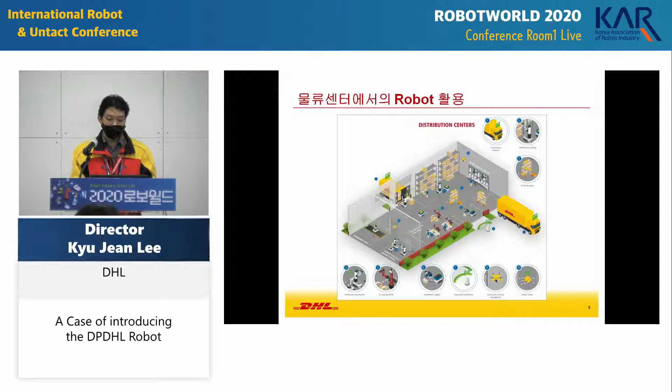These innovative ideas are happening in DPDHL, thanks to the Research Institute and our DPDHL Innovation Center. Our innovation centers are located on each continent. First of all, as you can see, we have one in Europe, in Germany.

In 2017, we newly opened one in Chicago. At the bottom, we have the Asia Pacific Center located in Singapore. These innovation centers not only provide R&D among workers but also collaborate with certain research centers and logistics experts. In our innovation centers, they carry out various R&D activities, and those products become implemented in our processes. This is the newly innovated center in Chicago, and I will introduce you to that center in the video.

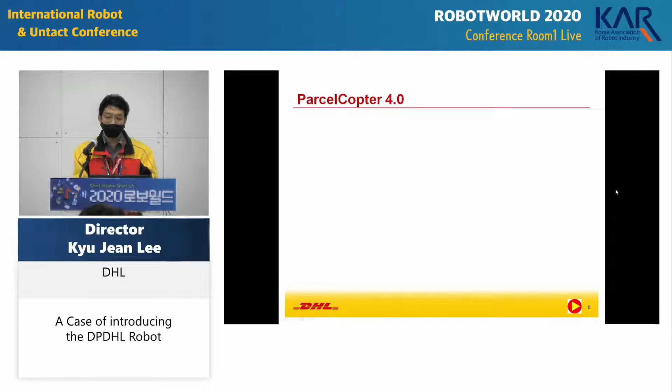First of all, it's called Parcel Copter 4.0. A lot of media has introduced our parcel copters. About 6 years ago, there was a big boom of drones. Drone started as a leisure gadget, but we started to utilize it for our logistics. We began R&D in 2010, launched 1.0 in 2013, and recently in 2018 we managed to roll out Parcel Copter 4.0. Usually we use this Parcel Copter in remote areas with low accessibility, like in Africa.

I would like to briefly show you the different versions. This is Parcel Copter 1.0, promoted in media, but it still had a lot of issues to improve. 2.0 managed to travel 1 kilometer. After modifying and studying it more, we improved the flying distance up to 12 kilometers, and the model now reaches beach areas and remote areas with low accessibility.

Next is Parcel Copter 3.0. The form changed a lot - we used to have 4 propellers, but now it's more close to a regular plane. 3.0 can fly 8 kilometers, and wind resistance and environmental conditions have been improved.

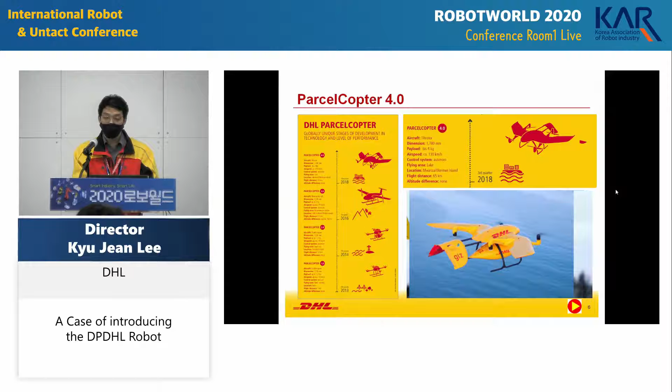In 2018, finally we rolled out Parcel Copter 4.0. It can easily fly and doesn't need a runway - it can take off vertically, reducing the requirement of space. It can fly up to 65 kilometers. This is a bulky helicopter, about 1.7 meters tall.

Now I would like to show you an actual case on site utilizing Parcel Copter 4.0. Let's look at the video.

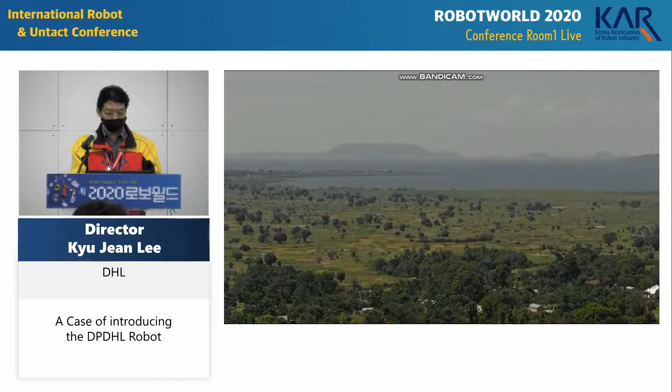Especially in areas that have geographical challenges, like Ukerewe, which is in the midst of Lake Victoria, we have more than 400,000 people in Ukerewe district, and we face a number of diseases such as malaria, typhoid, schistosomiasis, and the like.

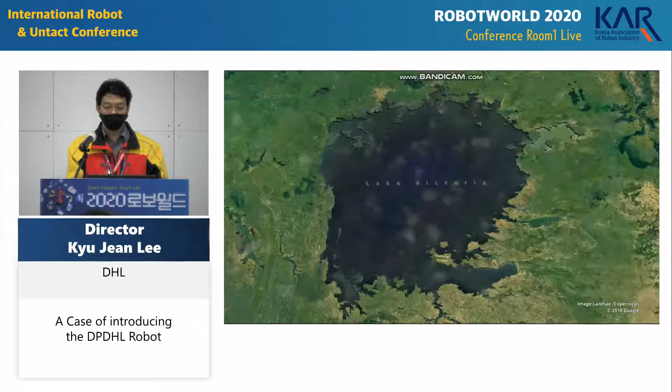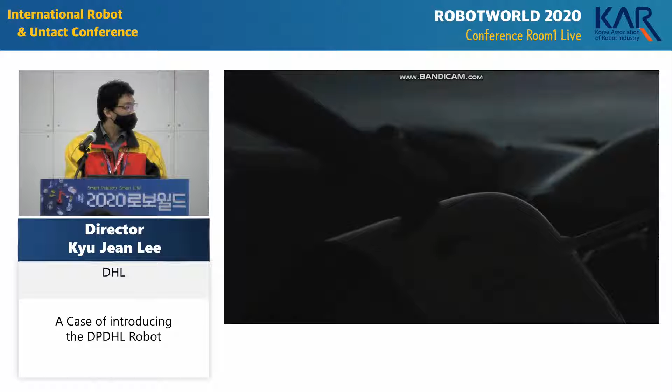We are responsible for distributing medicine in the Lake Victoria region. The last mile supply is so difficult because of the infrastructure - our roads are still very poor, especially in rural areas. We can go by lake, but the vessels there are not reliable, and you don't get the necessary medicine delivered. There is a threat of death. We thought about how we can improve the delivery of health supplies, especially to those hard-to-reach island areas, and that's where the Parcel Copter comes into play.

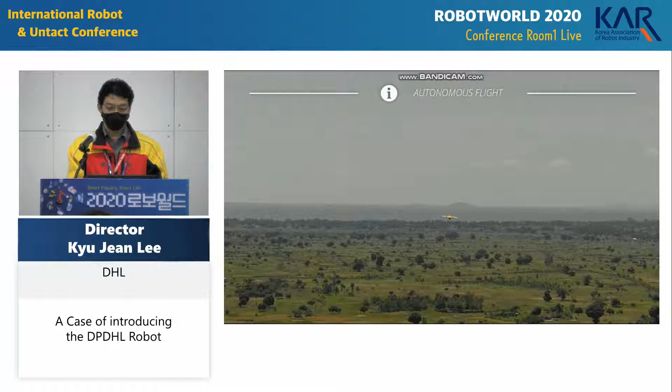The drone can overcome a number of challenges, especially in areas that are not really reachable. The Parcel Copter flies autonomously, and we can see where the drone is in case we need to make any decision at the right time. The technology gives the drone the ability to go vertically and then change to transition mode, so it can land where you don't have runways. The technology itself is innovative in the sense that it really addresses challenges that we have in Tanzania.

There was a case with a tetanus patient needing quick delivery. Not only does the Parcelcopter deliver commodities quickly, but it maintains the cold chain, making sure the temperature is not compromised so products reach the patient with quality. We design the mission, upload it to the drone, and it sends autonomously to the place we want, like from Mwanza to the Ukerewe Islands.

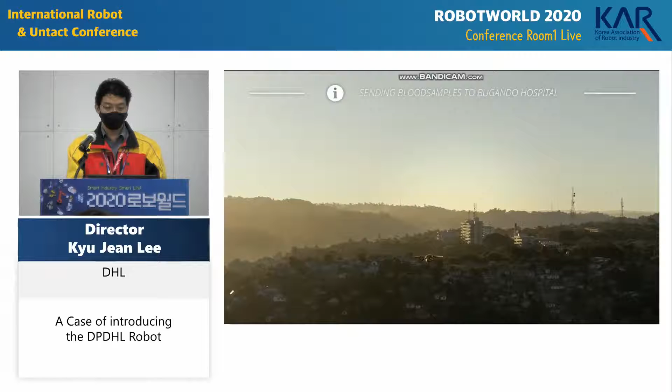Samples are collected at the district hospital, and on a weekly basis they are taken to the regional medical center. But with the Parcel Copter, they can be taken every 2 or 3 days instead, so patients get their results much faster without delay in treatment.

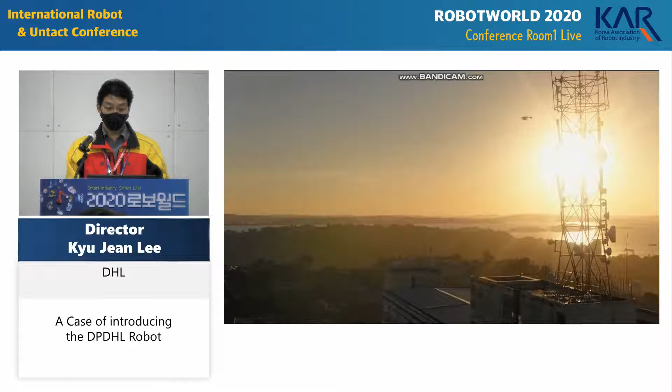I'd like to take this opportunity to thank DHL, GIZ, the Ministry for Economic Cooperation and Development, and the Wingcopter team. There were rough times when it started, but now we see light at the end of the tunnel.

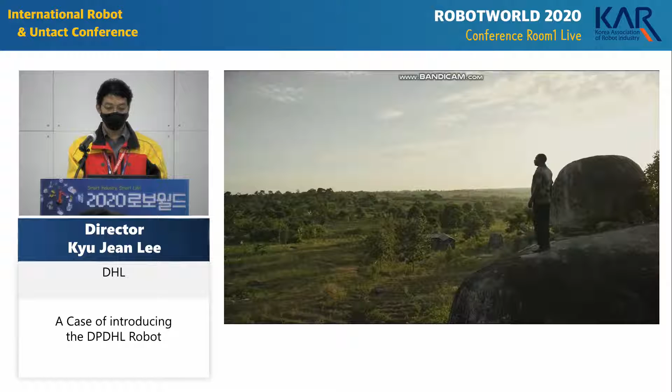If this can be carried throughout the country, that will be so significant. This is a project that is going to save a lot of lives and change the whole economy. This is going to be a big achievement, an icebreaker into drone technology in Tanzania.

And probably in Africa.

As you saw, we run all versions of parcel copters, particularly for hard-to-reach areas that need a lot of traveling, while there are still a lot of detours, and we have some challenges with heavy weights. So we focus on medicine delivery in particular at the moment, and we are constantly researching how we can expand this business. Let me move on to the next case.

The next AI robot is called PostBot. I would like to explain while playing the video.

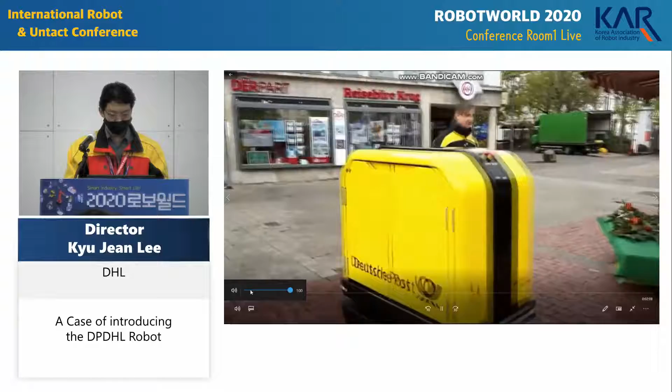Now, what you're seeing is the PostBot, an AI-based robot. If you look at this robot, this is specialized for delivering mail.

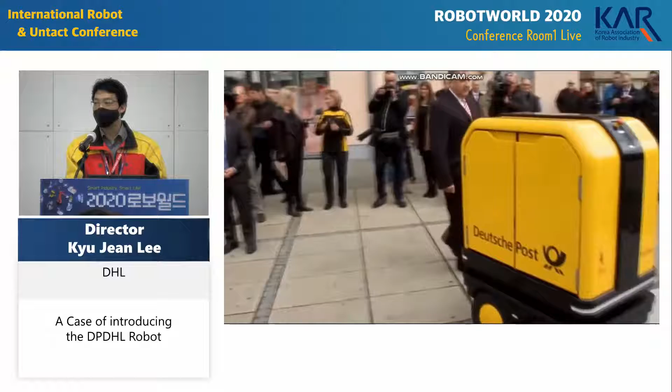As I mentioned, DPDHL stands for Deutsche Post DHL. So DHL in Germany also carries out some postal services, and sometimes they deal with various cargo and freight.

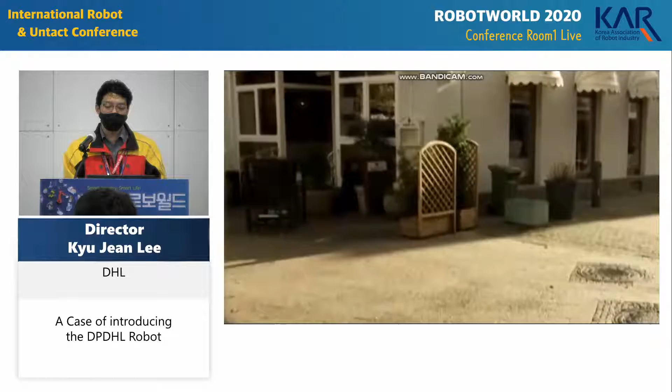So imagine our postal service. Sometimes there are areas you can't reach by vehicles, and you have to deliver many things at the same time. It will be very inconvenient if you go back and forth to your truck to load and unload the parcels. If you look at this PostBot, it uses a sensor, and the sensor tracks around the parcel and helps the mail carrier immediately deliver the parcels.

You can load up to 160 kilograms onto the PostBot. And you can imagine we can save a lot of time and energy for the mail carriers.

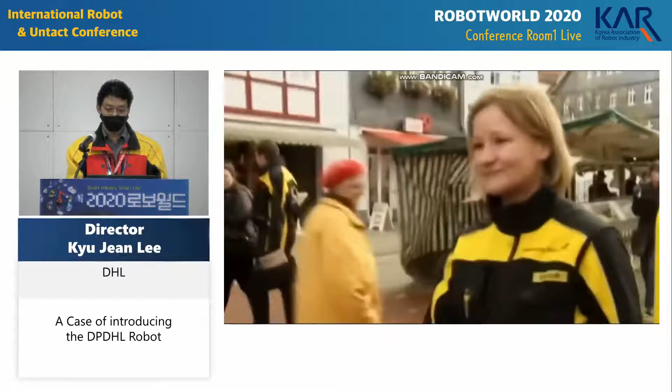So you just saw PostBot following around the mail carrier. How about PostBot going into the building? That's shown in the next slide.

This looks similar to PostBot. Functions are similar, but Effidence is not specialized in mail delivery, but specialized in cargo delivery.

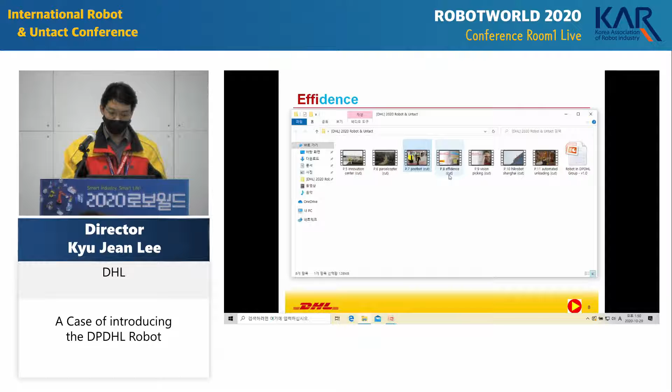Automation strategies are vital to warehousing and distribution operations. DHL is dedicated to offering a variety of automated systems to significantly increase efficiencies in customer operations. Now, DHL will lead the next wave of automation. Within warehousing, order picking belongs to the most challenging tasks as the demands made on order picking systems continue to grow.

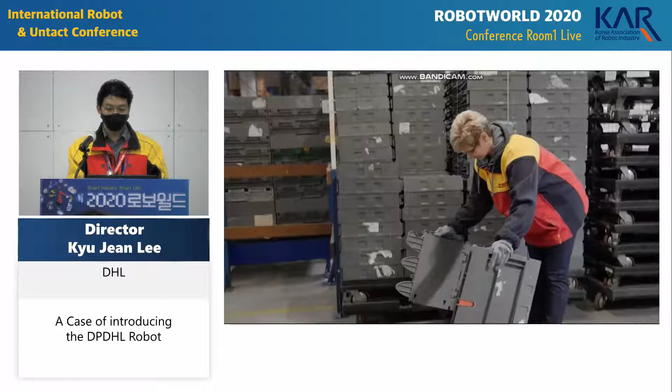When employees pick orders manually, their carts become very heavy. High payloads of orders — what you're seeing now is before Effidence was introduced, showing how our employees used to move to do the picking.

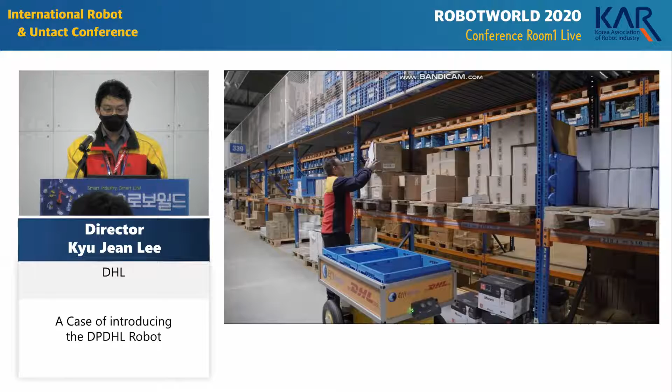Together with Effidence, we are introducing a unique solution to support our employees in their daily work and to improve efficiencies within the picking process. Collaborative automated order picking is the next step in improving warehouse operations. Pickers will be supported by automated carts, taking care of most of the physical activity. These carts enable pickers to work without undue exertion.

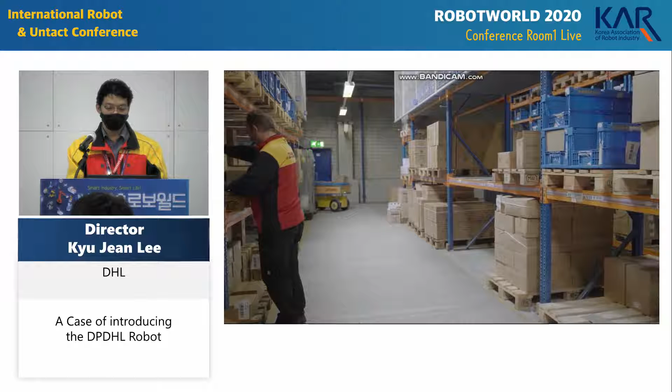The picking cart follows the picker through the rack system. Before the cart reaches full capacity, the picker simply sends it to the drop-off location. Meanwhile, another picking cart joins the picker, ready to receive new items. The cart's advanced wayfinding routine assures an independent journey to its destination. Sensors make the cart aware of its vicinity and possible obstacles. Therefore, collisions are prevented and safety is increased.

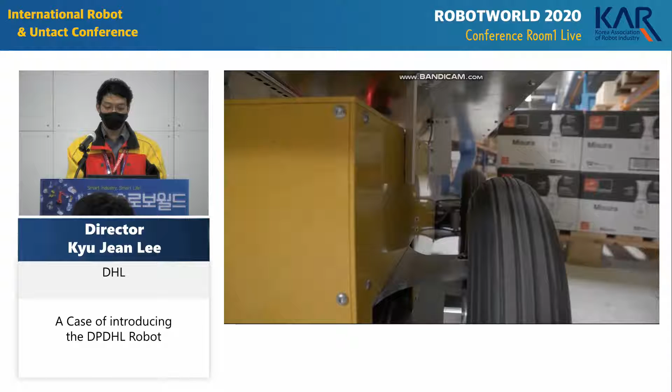Furthermore, this solution makes a more efficient and ergonomic picking process possible and enables the switch from single order to multi-order picking. Collaborative automated order picking is just one flexible solution that might fit into the world of logistics. We're just beginning to understand the magnitude of this impact. At DHL, we're prepared to innovate and navigate this road to the future of logistics. Along with our partners and customers, we're ready to take the front seat.

As you can see, once it reaches a certain volume, it goes to the next location and destination, and Effidence keeps following the workers.

We can drastically improve the human routes, and we can help these workers in an ergonomic context, so we can also prevent any damages.

I just mentioned picking, and let me introduce another picking technology. The next one is called Vision Picking. Maybe you've seen it before. You can imagine Google Glasses for AR, and while we can improve the visibility, we can also improve the efficiency.

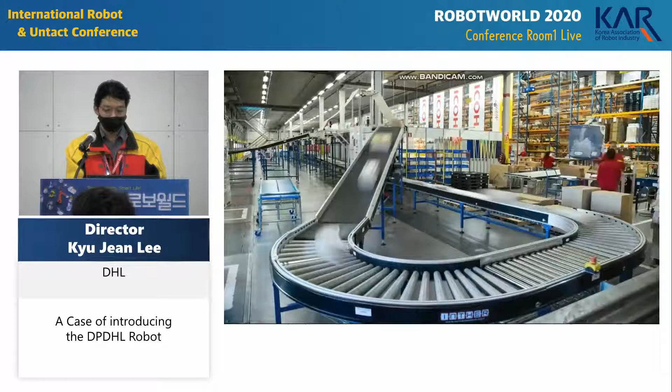Technology has always played an integral part in further improving warehouse operations. With the rise of augmented reality, we're about to take a leap ahead. DHL and Ricoh have piloted vision picking to drive the next wave of supply chain innovation that simplifies operations. Vision picking is essentially equipping pickers with smart glasses that enable complete hands-free order picking.

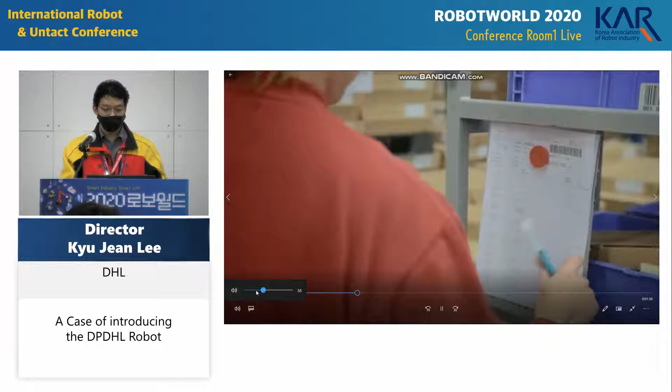Today, we're using a mix of handheld scanners and a paper pick list, but we think we can make this process leaner and more user-friendly by taking a paperless and hands-free approach. Vision picking can greatly increase productivity, reduce errors, and support our employees in their daily work. To find the best solution, we teamed up with Ubimax, the leading experts on wearable computing.

Their vision picking solution is the most mature and flexible on the market, and we're easily able to tailor this to our environment and deploy it on the Vuzix and Google glasses. Now the picker can easily log in and begin picking by scanning the next available trolley.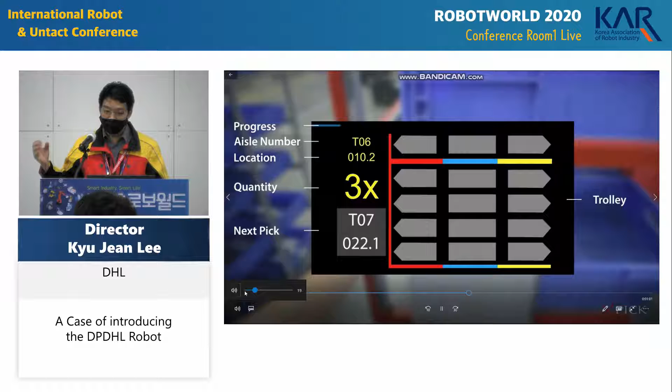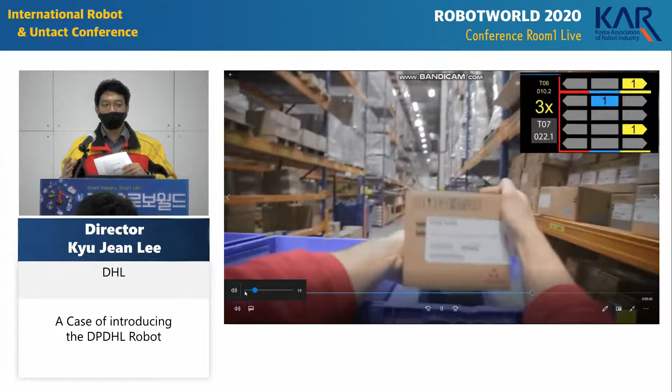The vision picking is actually guiding you where you can load the stuff in the right spot of the trolley. If you have less skilled workers, you can prevent some misloading, because sometimes they used to make the mistake of loading in the wrong order. But even if this person is a less skilled worker, this vision picking can improve efficiency.

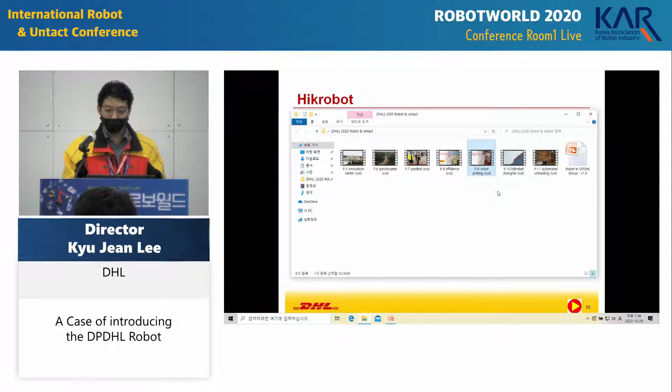Next robot is called Hikrobot. Hikrobot is a specific brand name, it is not the technology. If you look at the product, you can see them a lot in different conferences and events. It's not person to goods, it's goods to person - these goods are looking for people to be picked. If you look at this Hikrobot in Asia Pacific, we have an express hub in Shanghai where we actually carry out this Hikrobot.

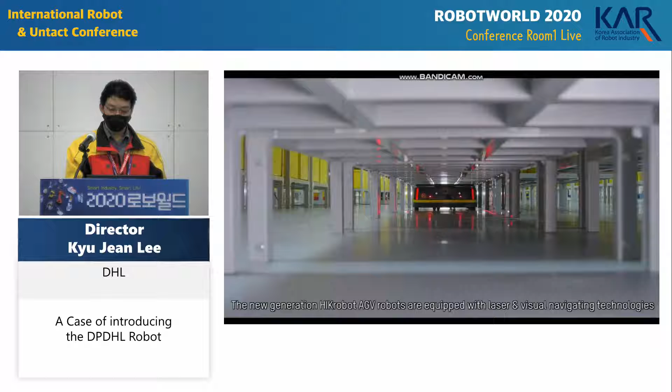Sorry, due to the time frame, let me stop the video.

By using Hikrobot, we managed to increase the work efficiency by 40%. Let's imagine instead of workers finding the rack, it was only 48 cases available per hour, but by using Hikrobot, we increased that number up to 136 cases. The last one is called automated container unloading.

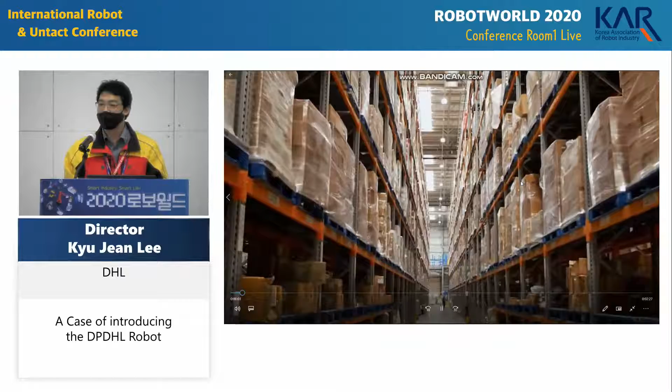Once we have large and bulky stuff, this device helps the efficiency. I won't play the video too long. As you can see, this is the traditional unloading - they had a space issue and only 1 or 2 people had to go into the container, and they had to do it manually one by one. But now by using a machine, we were able to improve the efficiency.

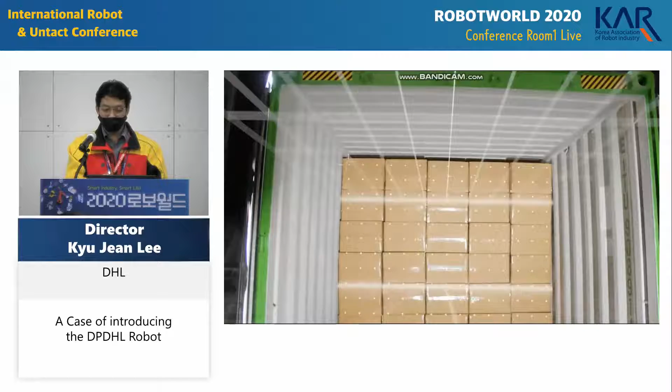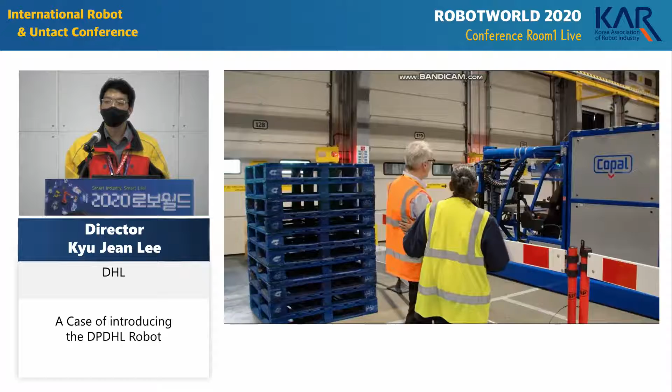This one you're looking at is the AI robot. We have the AI sensor in front of the machine, and it can recognize the type and volume of the boxes and decide the unloading method. Instead of people putting in effort, we are able to improve health and safety issues in an ergonomic context.

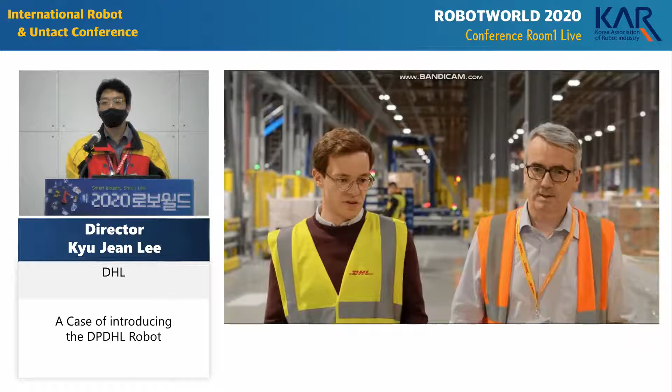In DHL, we value diversity. Often in logistics centers, we have a lot of male workers, and they are mostly skilled and muscular people, and usually these centers prefer younger generations. But as you can see, we have some older generations and some female workers in these centers thanks to this technology, and they are a great contribution to DHL.

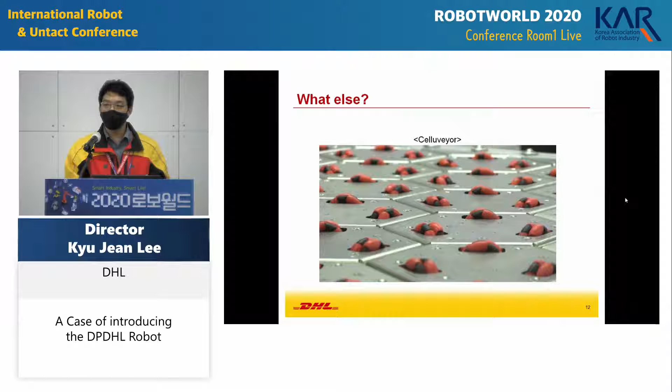I have a lot more technologies, but due to the time limit, that wraps up my case study. But you can imagine digital twin, Celluveyor, unlike the conveyor belt, and this is the innovation of the conveyor belt.

We have wearable robot arms as well, but in DHL these technologies do not remain on the textbook. We continuously carry out research to develop the technology. We invent technology, and other times, through M&A and collaboration, we purchase technologies. But one thing for sure is that we never stop continuing the innovation and our R&D. Thank you very much.

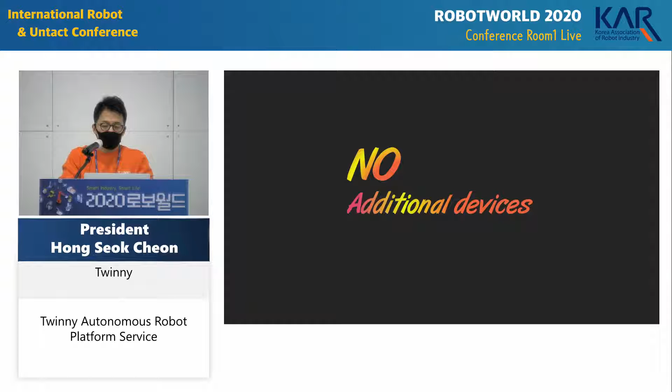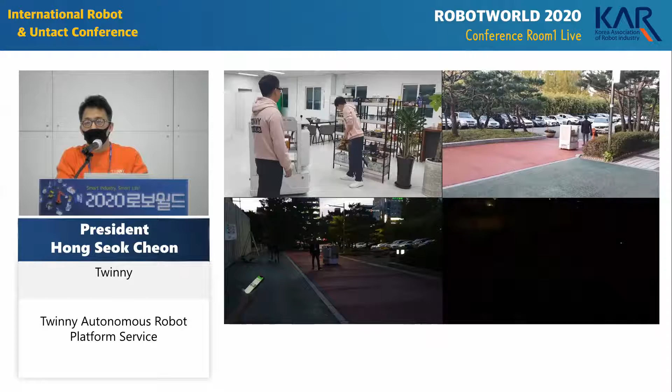On the left top video, we're twins wearing the same clothes, doing a demonstration. As this demonstration shows, the robot is not confused and follows the designated person without problem. We're showing the success cases, but we also face failures as well. Unlike other robots, the confusion possibility is much lower and it follows very well—good performance, but not as good as human beings.

If you see the video on the right bottom side, I turned the light on and off to see the effect of the light on the following. This kind of performance was possible because we used an RGB-D sensor whose cost is over $200.

It is capable of collecting 3D data, including location and color data. The color and location data are collected in a 3-dimensional way, and color distribution, size of each object, shape of the object, and other information are collected to form knowledge. Based on this knowledge, the robot follows an object. So the robot does not rely on specific color data, and that's why it can follow a specific designated person without any problem.

I also have two videos filmed outdoors, one at night and one during the day. If there is very strong sunlight, the sensor doesn't function well, but I intentionally took this video on a cloudy day for promotional purposes, to show how good we are.

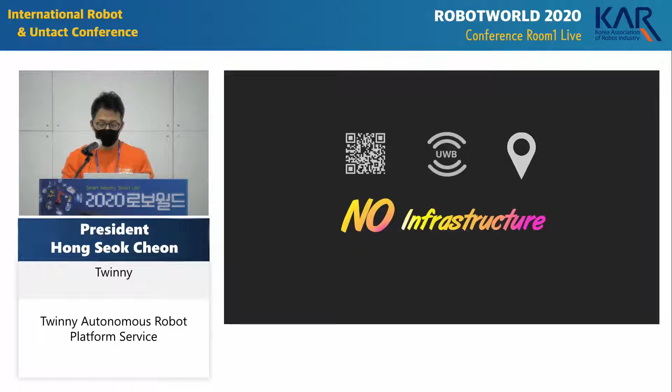If you were here yesterday, you must have seen it. At the Twinny booth, many journalists swarmed in, not just to take a picture of me, but because the Prime Minister came and did a demonstration, and journalists and so many people gathered near my booth without any additional infrastructure. If you go there, you see the robot roaming around the whole place, not just within the booth, and the robot does not get lost and goes around without any problem. So the complexity of the space does not bother the function of my robot.

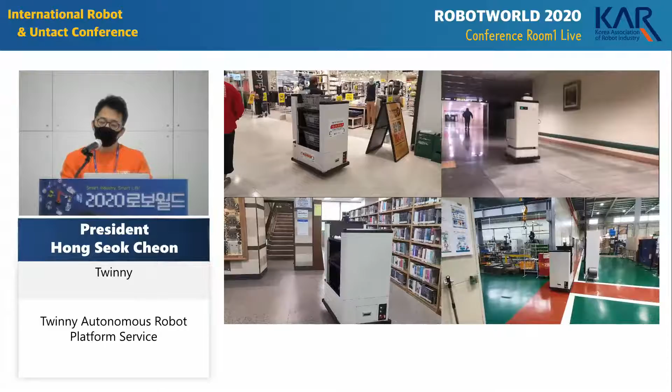This robot moves very well even at a mall, hospital, library, and logistic warehouse. I did multiple demonstrations in different places. In case of the warehouse, boxes suddenly disappear and appear, so complex. And in such a complex environment, the robot can drive itself very well. It can also go into very narrow places. I didn't expect it to be that good, but the performance of the robot was above my expectation.

If you see the demonstration on the right side, you can understand that the robot is being teased by the researchers, but I'm gonna skip it.

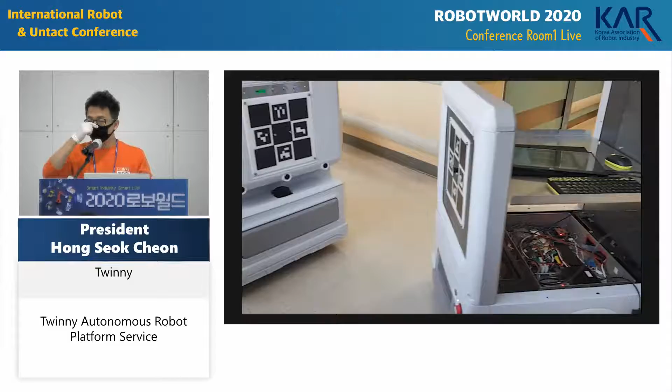So self-driving and following are all possible, so you can stack up or connect one robot to another like a train. Narugo and the robot behind work differently, but the basic principle of following is identical. So they can move goods like this in the form of a train. By using this train type, we did another round of demonstration, and you can see it on YouTube. So we have this self-driving capability, and we have a good robot who can move goods like this, and we did a demonstration, and we were highly received by the market.

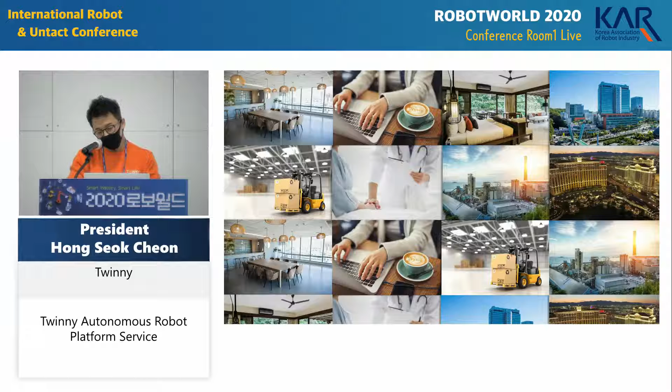This delivery can be used in many places, not just at warehouses, but in other places you need to deliver goods from one place to another. For example, we are demanded by hospitals a lot.

Twinny is a company specialized in self-driving. So we don't have a good understanding of those application areas like hospitals or warehouses. But the question here is, do we think we can satisfy our customers? The robot can satisfy us because it is good at self-driving, but it is questionable whether it can also satisfy my customers. That's why self-driving specialized companies have a harder time commercializing their technologies.

So we decided to just focus on the areas we are good at. For example, when you go to a hospital, there are so many good players who produce software for hospitals or other purposes, and maybe we can provide our technology to such providers so that the two technologies can be combined seamlessly. This is an example of such combination: our technology can be utilized as it is, and they can apply it to your business's items.

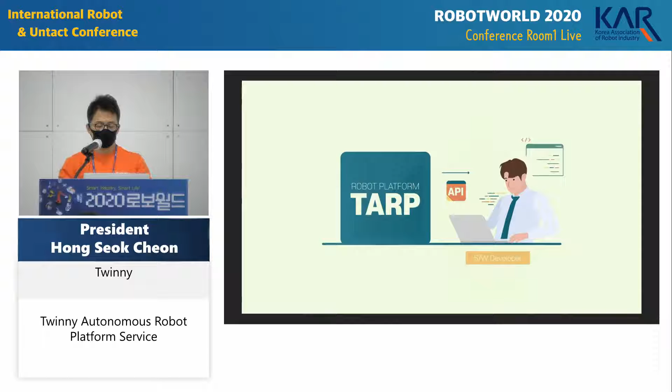So here's TARP, a robot platform for all of you. TARP is a company that produces self-driving software, and this software is provided to many suppliers and manufacturers. All the service software is coded by your company because we provide a customized API for you. TARP allocates work to each robot automatically, and by doing so, hundreds of thousands of robots can be controlled easily at a single location based on the Android platform.

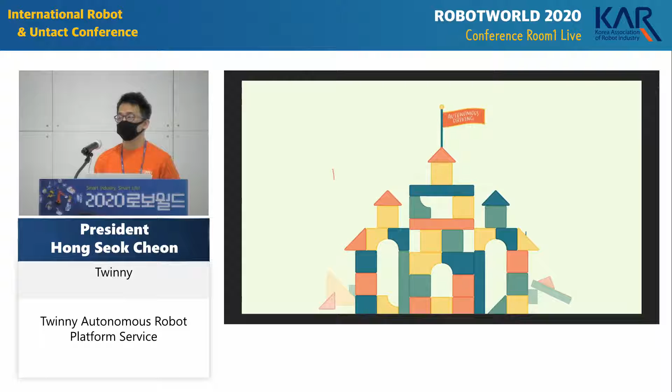Thanks to the development of the Android platform, many applications were developed that enriched our daily life and livelihood. Now TARP is another platform for your own good. Under this platform, you can build anything on top of it. The robot platform TARP is for all of you who want to connect the dots of self-driving technologies. I think this is wonderful: the playground for self-driving providers. I made this catchphrase actually.

Self-driving technology should not need to be understood by you. You can just use my platform to add self-driving function to your product and technologies. So TARP was born, and its stability level is quite good, so you can use it tomorrow or today.

Having just this platform was not enough, so we decided to make something based on this platform. Let's say you can use a smart application to control multiple fleets of robots. That would be amazing.

An optimal algorithm can allocate tasks to each robot. That's the key feature of my platform.

I demonstrated this to the Prime Minister yesterday, and it seemed perfect on the surface, but Taras is less than perfect, unlike TARP. So yesterday, actually, I had an issue, and my employees would not like me sharing this kind of shortcoming of my technology.

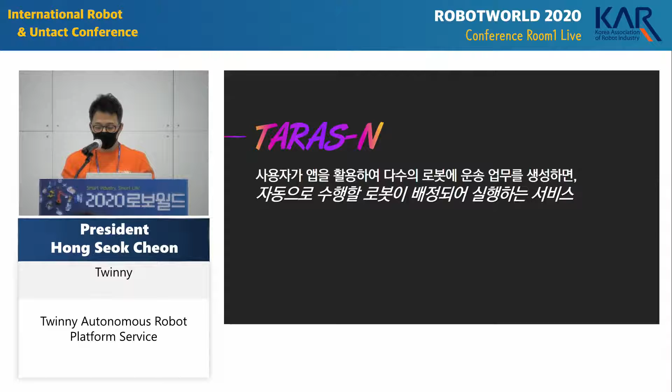It was not because of a bug, but because there were so many people near the destination, so the robot was not able to get closer because it did not have any communication function, so the robot was not able to tell the other person to go away. So we human beings did that instead and finished the demonstration.

Anyway, the Taras application is provided in the form of a smartphone application. You can create a command for a robot.

Let's say: bring this mask to a person over there. You put the command, and one robot is allocated with that task depending on the location and the battery status in an optimal way. That robot comes to you, gets the mask, and delivers it to a specific person.

The person checks the completed button, and the robot goes to the destination. When the robot reaches the destination, I receive a message. Then the robot leaves to do another job or goes to the charging station for charging.

And I'll show you another video clip like this.

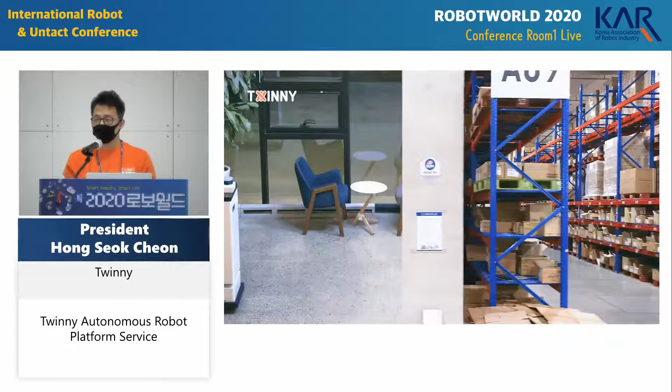So it was not helpful to understand Taras, but it took...

It took $10,000 to make this video, so I had to show you.

Let's say you want to deliver a product to a person B, and you're person A. You need to go there and hand it over, and then need to come back. It took ages to do this job.

Another person used this autonomous driving robot, and she doesn't even need to stand up. This is the Taras transportation service.

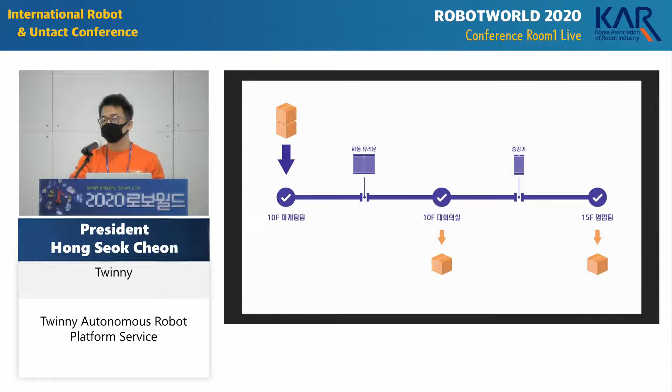This unmanned delivery system works like this. You prepare the item to be transported, and let's deliver this product from one place to another. You put an elevator in the middle to see whether the robot can use it or not.

You use this application to start the system. You put in the information, including the object to be delivered and the person who needs to get the product. And you get the message.

Everyone gets the message, whether you received it or sent it. And when they confirm, the service starts.

Among all the robots, depending on the battery, the location, and the route, the robot that can do the job in an optimal way is selected. Maybe this robot this time.

Without any additional input, the robot understands and scans the neighboring environment and drives autonomously, and the machine can even use the sliding door, thanks to the power of the technology of my company.

When a robot arrives, you put the object on the robot and leave the work to the robot, and you can do other work.

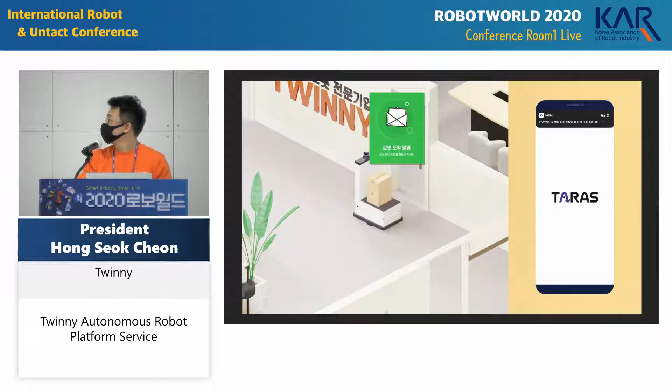The robot goes to the destination, and all the sensors on or in the robot are enough for the machine to avoid all collisions with human beings or objects.

When the robot arrives, the person who received it confirms it, and the robot leaves for another job.

One of the important features is that the company can be connected to the elevator server and use the elevator. Also, the machine can understand how many persons are inside the elevator and decide whether to use it or not.

There are narrow paths and sliding glass doors to be passed, and the robot can even rotate 360 degrees so that it can pass all places without any problem.

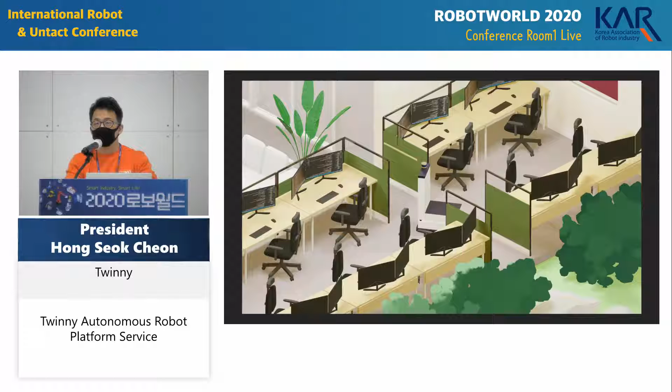The robot reaches the final destination, and the job is done. When receiving it's confirmed, and if the battery is too low, it goes to the charging station for charging.

It can be used for any industrial places, including hospitals and warehouses. With Taras, your business will be expanded twice and your happiness will be tripled.

Unmanned transportation service, Taras. If you go to my booth, you can actually see this robot. You can ask for a demonstration and we can do it.

So this transportation service can be used wherever you need to move some product from one place to another. All you need is a cell phone.

So what would be the future application of it? Since it is based on ordering and picking up the product, maybe we can use these machines for other purposes.

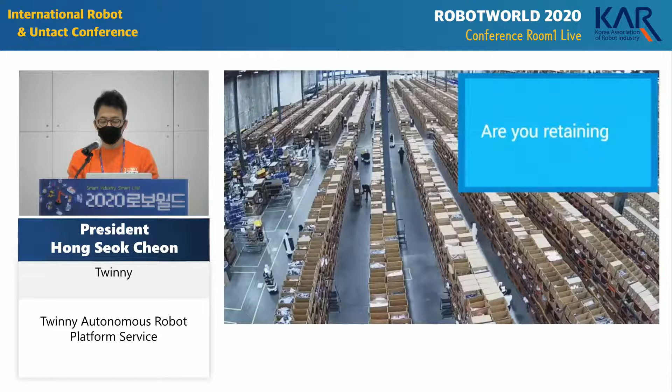Actually, there is a robot called Locus that is quite similar to our product. There are so many people moving from one direction to another, but their movement is limited within a certain space. So the whole large movements are made by machines, and human beings are just doing limited jobs within a certain space. They receive the product from a machine in one place and do the job, and the operator does not go beyond it. The productivity, as I heard, was tripled or doubled. I'm not sure whether it was tripled, but at least it was doubled, I think.

But what about the cost of robots? Because it shouldn't be more expensive than the recruitment of human beings. Whether it is night or day, weekdays or weekend, robots can do work.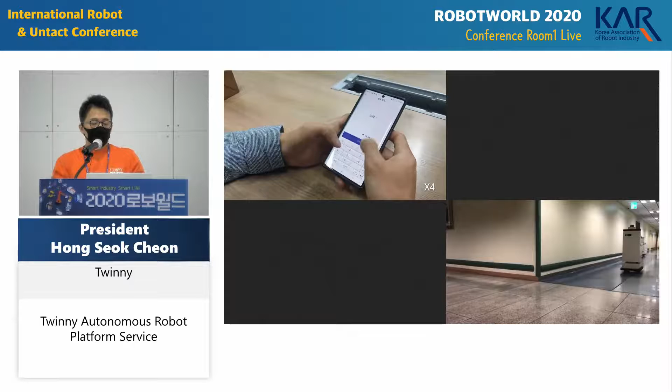You use the application and create a job task. After creating jobs, the robot starts to move. This was filmed at Korea University Sejong campus.

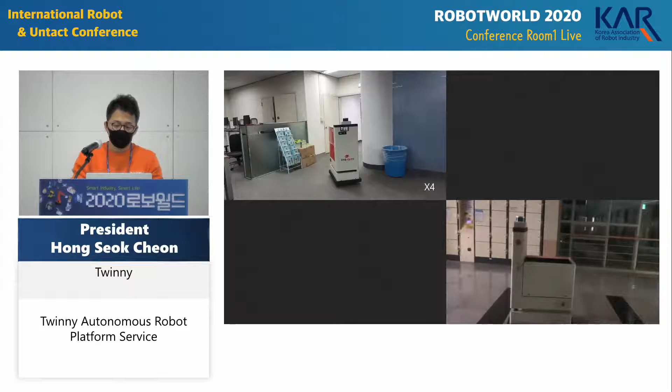I had a chance to work with the Korean Postal Service, and actually yesterday the Minister of Science and ICT also saw my demonstration, and it was crowded, I heard. It was as crowded as the demonstration yesterday, and the mission was completed beautifully. So no matter how complex the places are, without any pre-installation of infrastructure, the machine can work and get the job done.

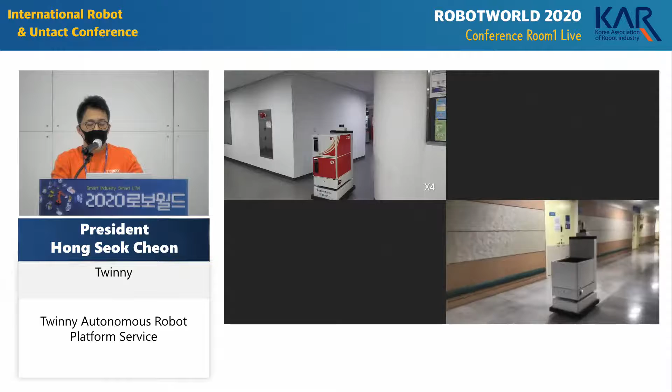The machine can go backward and forward, back and forth, but we programmed it so that it should go forward rather than backward, unless necessary. It always detects the optimal route, and it can go backward if necessary.

So the machine received the product like this, and you push the confirm button on the smartphone application. My brother is teasing the robot like this on the bottom to see whether the robot can avoid him or not. It was filmed at Yangsan Hospital. The robot didn't have any issue avoiding my brother.

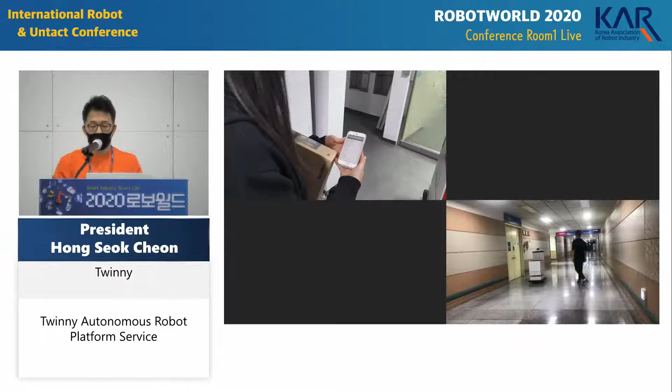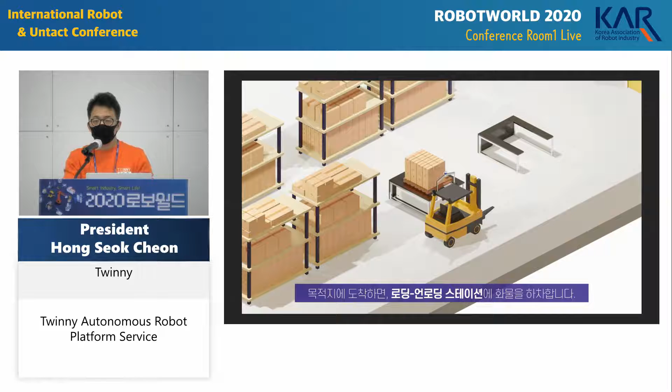Here's a loading and unloading station. That's why there is a suffix L.